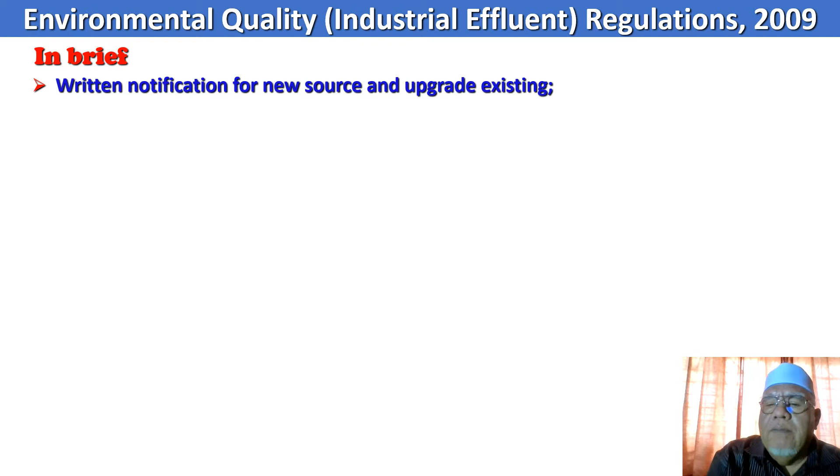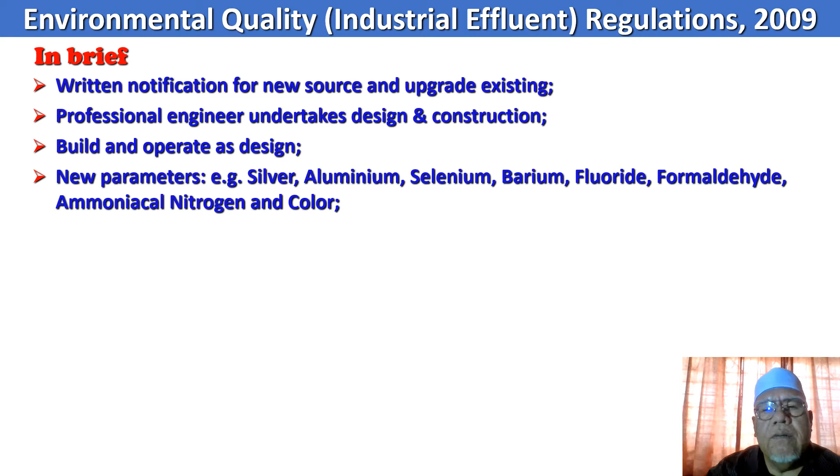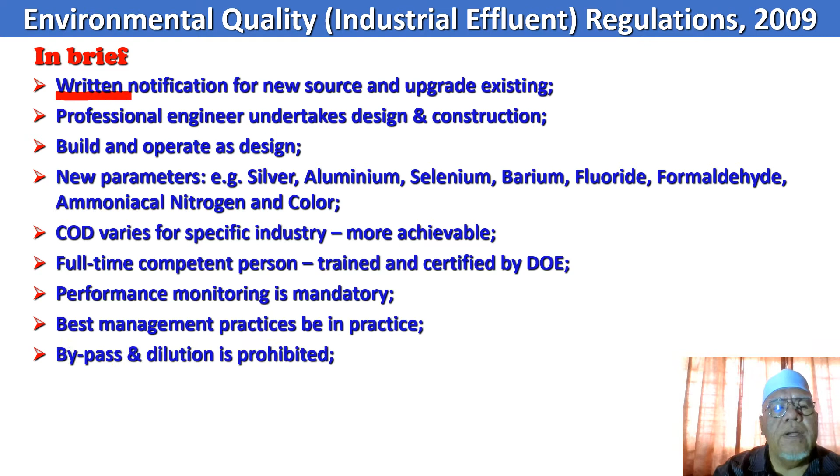Now, I'm giving you some important content of this particular law, a summary of how it would look like. This is an overview of the content of this particular regulation. Now, the first one, I believe you are well aware that in this regulation, Industrial Effluent Regulation 2009, there is no longer the requirement for kebenaran bertulis as it was before 2009.

So, if you need to do any work, especially installing, construction or building, or even modifying or expanding your existing industrial effluent treatment system, all you got to do is to submit a written notification, a bunch of documents, to the DOE, and that's it. We will explain that later in the next few videos.

And all drawings, especially structural drawing, engineering drawing, have got to be endorsed by a professional engineer who is registered with the Board of Engineers Malaysia, if you're talking about constructing or doing any work in the construction of an industrial effluent treatment system in this country.

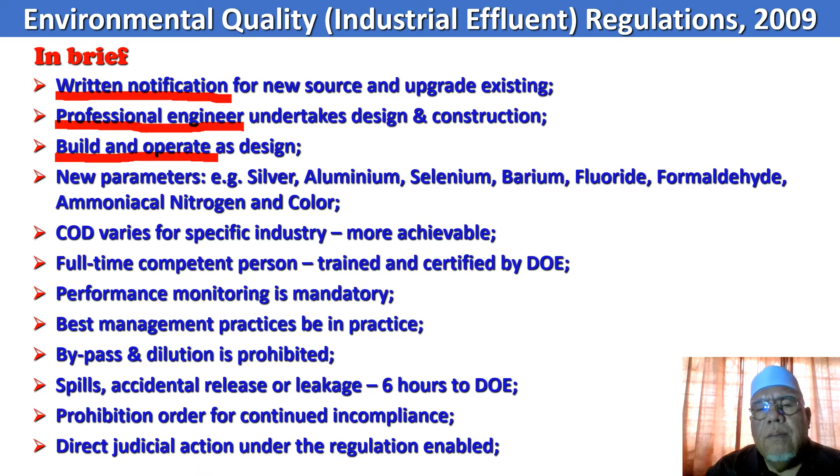Okay, and this law also specifies that we got to build and operate as we designed, the same design that we have submitted to the authority, unless there is any inevitable modification to the design while construction is ongoing. Well, this is engineering in practice. Civil engineering, mechanical engineering, electrical engineering. Then any modifications, any changes have got to be indicated in drawings and then resubmitted as-built drawing.

Okay, and in these new regulations there are several new parameters included which were not found in the previous 1979 regulation. So this is 2009. You now have silver, aluminium, selenium, barium, fluoride, formaldehyde, ammoniacal nitrogen, and color as new environmental parameters for effluent discharges.

All right, and the chemical oxygen demand also differs for several industries, especially textile, pulp and paper. They are subscribing to different chemical oxygen demand discharge limits. The rest will be, if I'm not mistaken, 200 milligram per liter, not more.

All right, and in this particular law, apparently we need a full-time competent person who is trained and certified by the DOE. I believe you know EiMAS, all right? A competent person graduated from EiMAS. These people are well trained, with all sorts of experience and academics to enable them to be competent. They even have got to do a thesis. It's an extensive course, and I salute those competent persons who graduated from EiMAS. They are very good. However, the law stipulates a full-time competent person.

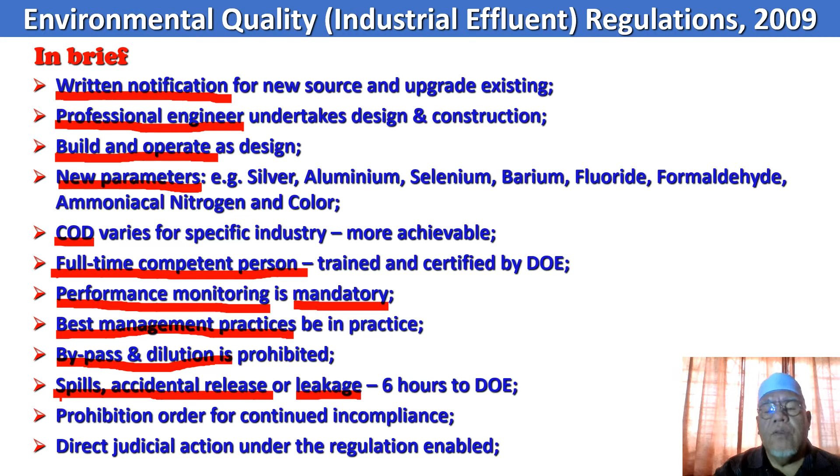these are all environmental aspects. What are the environmental aspects? Treated effluent or even raw effluent in situations of spillage or accidental releases or even leakage in any parts of the IETS, the entire system. Any leak is considered in environmental management system ISO 14001 as an emergency situation, and for that we have 6 hours only to inform DOE. You better do it quicker than that, because why?

As this video is being recorded, we just encountered an issue with the Sungai Gong, Selangor, where the KL folks and several parts of Selangor, a few million people, were affected due to water stoppage. The catchment area prior to the intake of potable water treatment was apparently contaminated, and the authorities found the culprit, they have been sent to court and they are compounded 640,000 ringgit.

I'm not sure. I leave the liberty of thinking and judgment to all of you, but what I see is that that particular incident has caused millions of people to be affected in such a manner, full of inconvenience, pain, suffering. I'm not sure that 640,000 ringgit would compensate those suffering. And the money goes to, of course, the Attorney General, if I'm not mistaken.

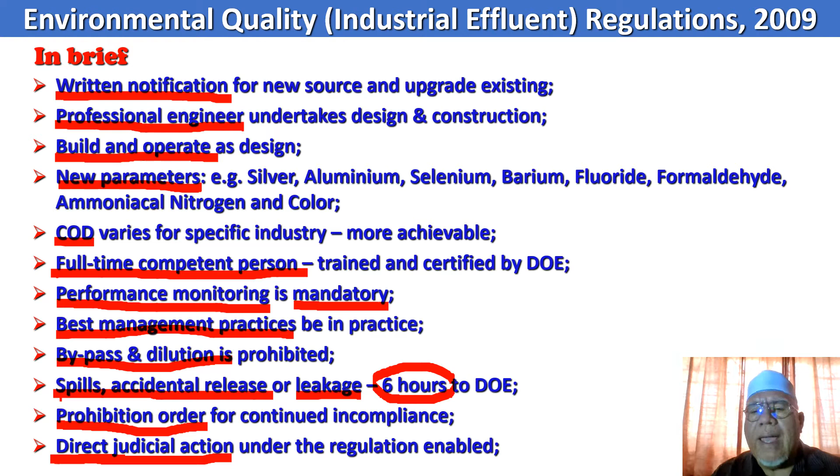That evidence of our non-compliance, the data, can be used to take us to court, and they can take us to court using this regulation, not having to use the act, okay, the main act. All right, that's the law, basically what it contains in brief. And

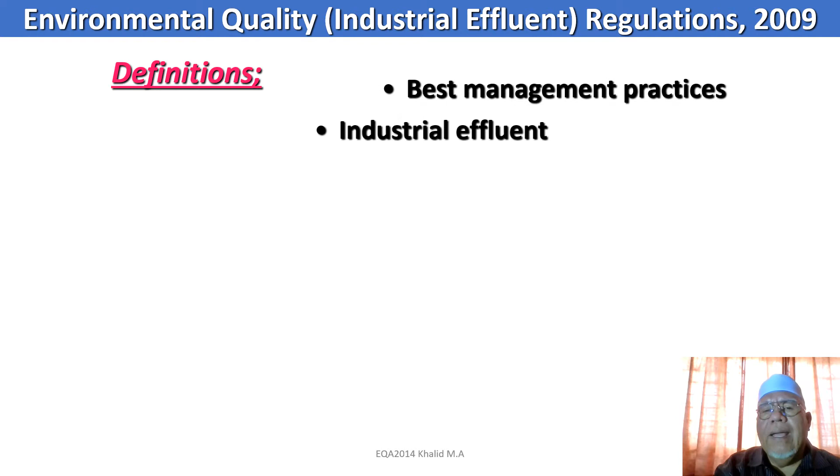What I have here are some of what they call terminologies, okay. All right, let's get into the first one, the definition of best management practices over here. All right, we'll look into this right now. Now,

According to the law, it's any means of practical, structural, or non-structural methods for the purpose of preventing or reducing the discharge of industrial effluent or mixed effluent containing contaminants. Now, the word is preventing or reducing contaminants in the wastewater, probably reducing the volume of effluent, probably reducing the load of certain parameters, suspended solids perhaps, COD or BOD, or even maybe certain other heavy metals, okay?

And it could involve structural modifications. Perhaps there is some form of ammonia that suddenly pops up in your effluent treatment plant, and there you are. You use good adsorbents, as I've seen in practice, such as an activated carbon column. That is a good adsorbent. It can absorb ammonia and other volatile organics, okay? Or you may have some structural modifications according to this law to prevent and reduce.

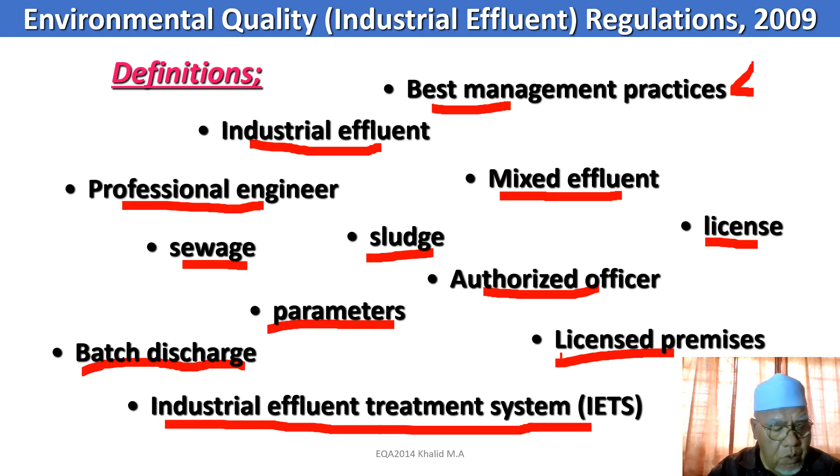Now, the law also defines industrial effluent treatment system. We just finished talking about it. According to the law, IETS means any facility including the effluent collection system. There you are, effluent collection system. Your sump pit, your equalization tank. Designed and constructed for the purpose of reducing the potential of the industrial effluent or mixed effluent to cause pollution. Wow, fantastic definition. The purpose of IETS is to prevent water pollution. Simple as that.

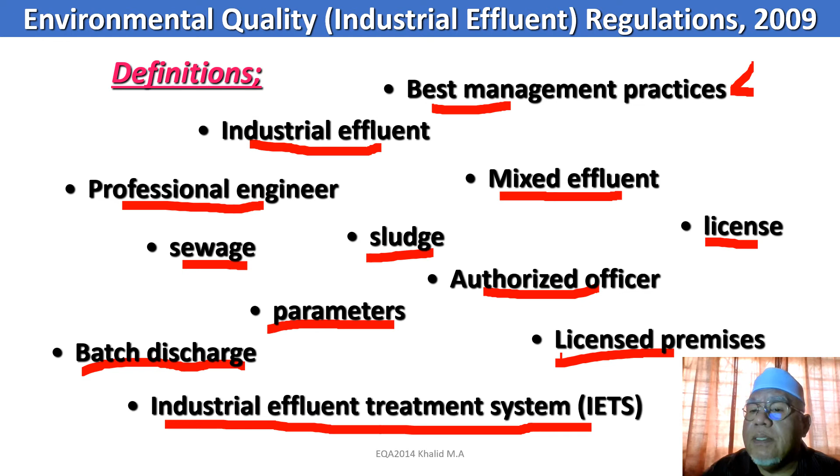The Chinese verb is kau tim. After you kau tim, it is past tense - kau tim de. While you are kau tim, the thing is kau timing. So don't blame me for my spoiled Chinese, I'm spoiled by my Chinese counterparts. Okay, blame them.

Now we have here this part. This is a crucial segment of this presentation. I'm doing it specially for you.

Okay, if we are any premise that releases industrial effluent or mixed effluent, we are subscribing to this law, aren't we? It depends. It depends on a few conditions that I'm about to discuss below this. So it could be industrial effluent, it could be sewage, or a mixture of sewage and industrial effluent, then we call it mixed effluent.

And I want to show you this. There is an exemption clause, not subjected. Who are not subjected to this law we are about to see right now? So it is Regulation 3. Regulation 3 is stipulating that the following activities, the following premises, the following manufacturing processes do not subscribe to this particular regulation. What are they?

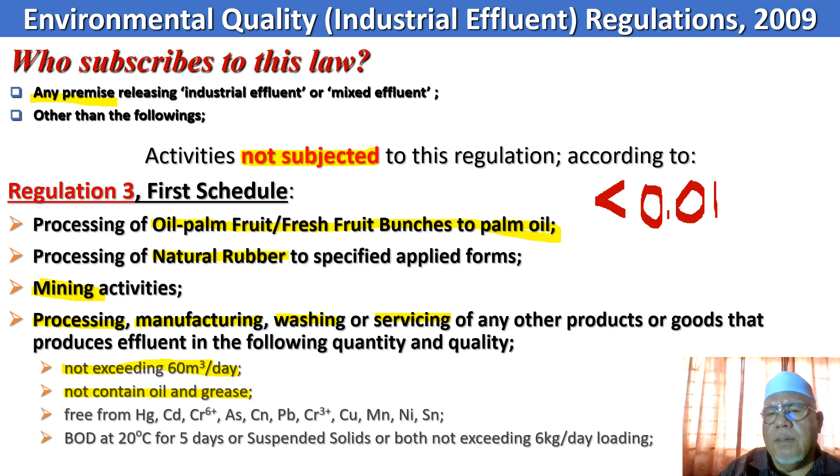There is a semicolon. Provided our effluent - look, do not contain, what does it mean? Free from oil and grease. Free from - that is why chemists, if you have a lab, in your lab report, do not use this 'less than 0.01 milligram per liter'. I've preached this since the year 2000, and I've trained this to almost all the factories that came to the training, labs, chemists.

And I hope this knowledge has been going around right now. Now, if you report as in that manner, less than - what does it show? This particular symbol, what does it show? Absent or present? Absolutely absent or absolutely present? Now, in legal term, when we see 'less than', it means present.

So, to ensure that our client is really not susceptible to this clause, not containing, free from, we should report as - I think you know by now - 'not detected'. Please report as that. And look, free from - there you are. One is not containing, one is free from, absolutely free from.